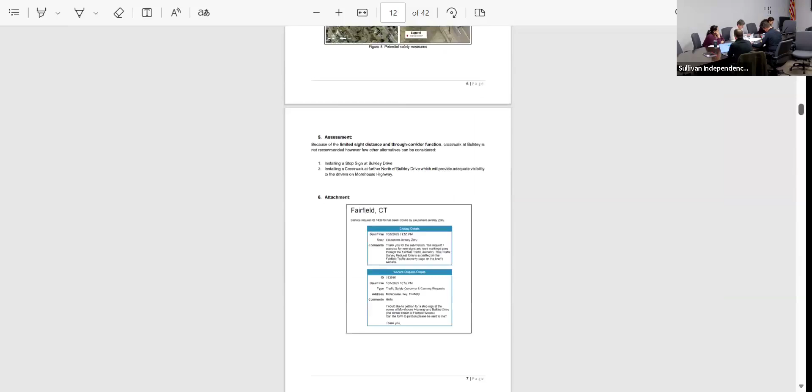There was a diagram in the packet. Can you pull that up? Yes, let me pull the diagram out quickly so I can easily see. I don't see the location properly written on the report. Yeah, it does show it's slightly west of where that roadway intersects, the Y intersection. Yeah, it's Mill Hill Lane, just southwest of Mill Hill Lane. Okay, you can see it.

So that's the location. That's where we are proposing a crosswalk because of the adequate sight distance, since there's an entrance for cars there. That's the right location because residents have been requesting pedestrian crossings. There's a school nearby, and when they're walking, they don't have any crossings, so that was the reason we're proposing a crosswalk over here.

Any comments or questions, or anything anybody has?

I have a question. It's hard to tell from this drawing, but is there a sidewalk from here up to the school? No, there's no sidewalk, right? I don't think so, no sidewalk. There is a sidewalk on the Mill Hill School side, on the same side as the school, but not one across the street where this crosswalk would originate from. It was hard to see from the drawing. Yeah, it's not very clear. So there's a sidewalk right here? Yes, yes, okay.

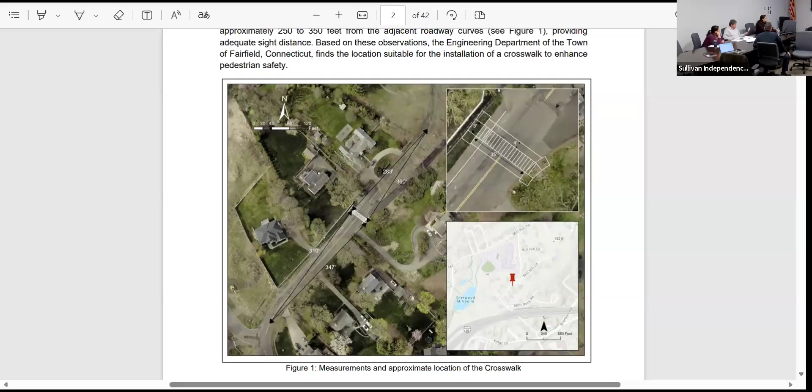Can we put fog lines in, so there's a place to walk? Well, that's what I'm saying, today the request is only for a crosswalk.

Put a fog line in or not, well let's see, quickly I'll go over the width of this roadway. I don't know, they haven't captured the roadway width either here. I think it's right there, 30 feet, 35. It's 35, so there's a fog line here, but it doesn't look like there's a fog line on the non-Mill Hill side.

Does it seem like there's enough space to put one? At 35 feet, we need, what, 20, right Megan? We need, well, 20, yeah, usually it's 24.

Yes, that's pretty... but Jeff, just to note, I'd been out to the site, and that 35 feet is a little bit misleading because that's at the edge of the intersection. Mill Hill Road itself is probably not 35, it's probably more like 24 or 30 at most. It's because you're at the widest part near an intersection, so it's a little bit wider than the rest of the roadway.

That crosswalk location was selected because if we put the crosswalk on the north side, or the other side of the intersection, there was a grade change which would make it very difficult to meet ADA compliance. And on that side, the shorter distance of 283 for the sight distance would go below, like, 250 or 220 or something like that. So I would even reduce the sight distance further there, which is why we actually had to move the crosswalk to the other side of the intersection.

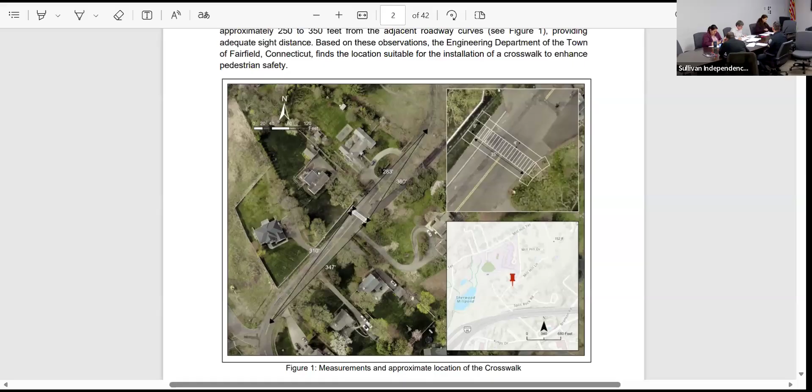We also have 2 reported crashes at Morehouse Highway which resulted in injuries. There's an angle crash, and one fixed object crash. So there were only 2 crashes total, and the crashes are shown on the map. I can actually scroll as I am talking, if I can.

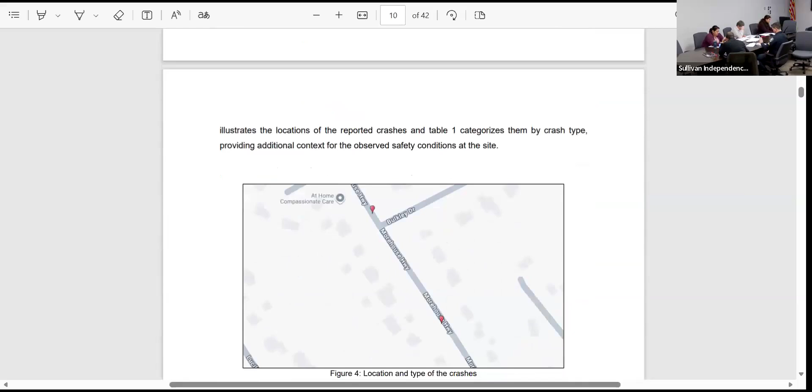So let me open the plan, just bear with me. Here, so I have the crash data, the red marking shows the crash spots. So that's the kind of background on the data collection.

So there are two issues. One is the site observation. When our intern went out and observed the site and collected some data, he was turning left from Bulkley Drive onto Morehouse.

He said that there's a sight line issue. He cannot see the cars coming, and it's very hard to judge the speed, and it was very hard to make the left turn. When we visited back in November, we noticed similar issues, a sight line problem because there's a crest curve at Morehouse Highway. So that's an observation and perception we noted.

We also further evaluated the stopping sight distance because there is a crest vertical curve at Morehouse Highway near Bulkley Drive. Bulkley Drive makes like a U there, so I'm just talking about the first part of Bulkley Drive, not further north. So that is a critical spot.

So when we calculated the engineering calculations, taking into account the vertical crest curve, we used a 6% grade. We also took into account the object height and the driver's eye height, and we used the AASHTO manual. It says the stopping sight distance at 25 miles per hour should be 155 feet.

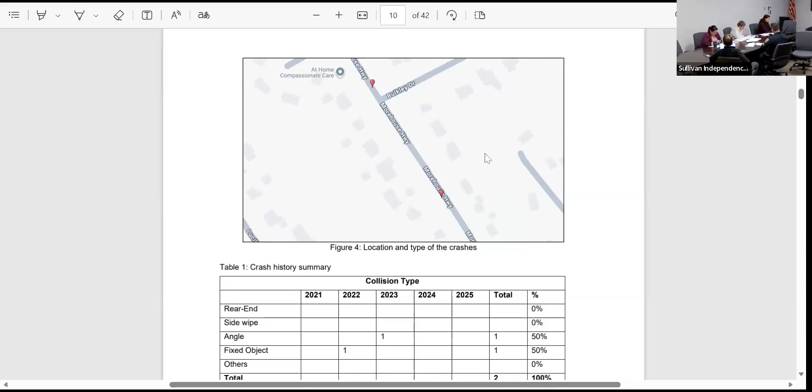Another suggestion - somebody spoke to Bill and said they want a crosswalk. So if any crosswalk needs to be proposed, it shouldn't be at Bulkley Drive, but further north at Bulkley Drive, which we've shown on the plan. So those are the two alternatives we're considering: first to improve this stopping sight distance issue, and second, the crossing issue that was brought up.

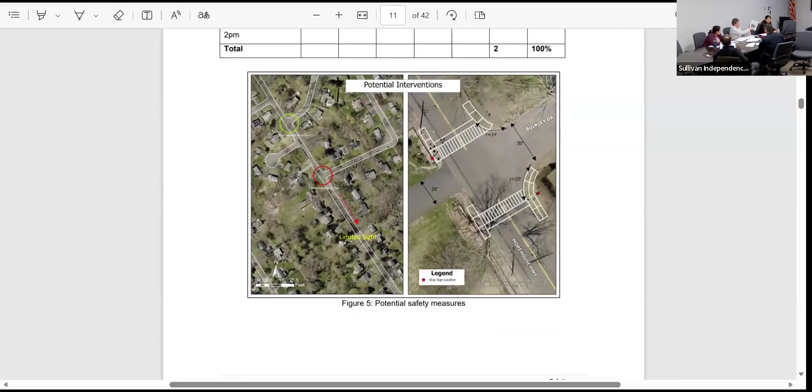Can I ask a clarifying question? Is the proposed crosswalk at the first Bulkley Drive or the second? Second, the further north one. Yes, okay, got it - this green one here. The first, or if you're going north, it was the first one, right?

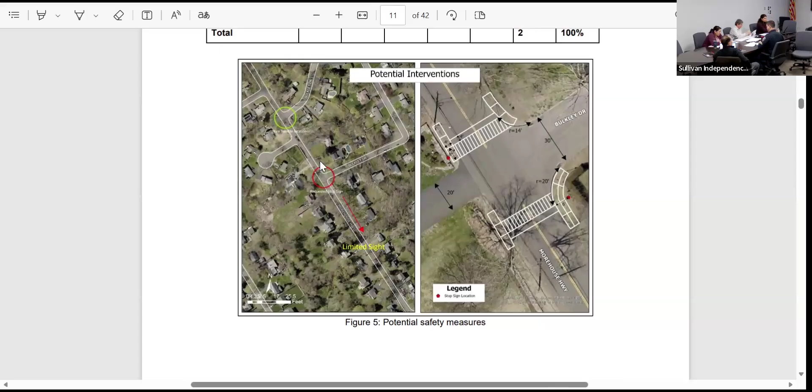Not this one. Yeah, it's the first one, but it shows two possibilities for a crosswalk. That's where the sight line issue is - the northern crosswalk at the southerly intersection, more southern part. Yeah, there's no... and that's where there's a bit of a sight line issue. But you're saying the proposed crosswalk is the northerly extension of Bulkley?

So a request for a stop sign is at the southerly extension of Bulkley. The proposed crosswalk is at the northerly extension, this green one. Okay, got it. Green is where the crosswalk goes, but the red one is a critical zone I'm talking about - the sight line issue.

So that's where we are. But what does the detail look like - does it correspond to either one of those? I don't know why they're putting two crosswalks. I only know that green one - there's a street across, is that a driveway across the way there? Yeah, it's a driveway, about 20 feet.

Okay, I will just go with this green one - I mean, I will go with this crosswalk. I don't know what this other crosswalk is here. That makes sense. So that's one alternate with this crosswalk here, and then the red one is a critical zone. May I ask another question?

Is it desirable from a roadway design perspective to have them be separate, or would it be too confusing to combine those features? I'm asking just for educational purposes. If you ask me, I would just make one. I don't know what these two driveways really make confusing.

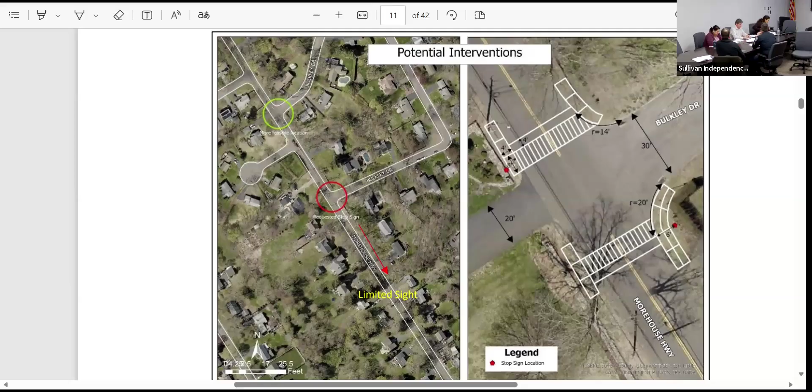Good, I'll move on to the third one: stop sign request on Pansy Road at Valley View Place. This is another one we received and had to do further studies. We presented this in November and did not make any decisions because further studies were required. Let me move on to my screen so anyone on Zoom can see it.

So this is where we are. This comes from a resident at 62 Pansy Road. They're concerned about speeding and reckless driving passing Osborn Hill Elementary School in both directions. He thinks this is a dangerous situation for students and parents walking to and from the school, as well as many seniors and dog walkers. Additionally, they're concerned that the proposed 18-unit condominium development near the intersection of Stilson Road and Black Rock Turnpike, along with two new homes planned on Pansy Road, is expected to increase traffic volumes, including heavy construction vehicles, with many needing to use Pansy Road as a cut-through route to bypass construction-related delays at the condominium site.

So the resident has requested two things: installation of a stop sign at the intersection of Valley View Place and Pansy Road, and increased enforcement by the police department, including targeted speed enforcement and issuance of speeding tickets. So that's where we are.

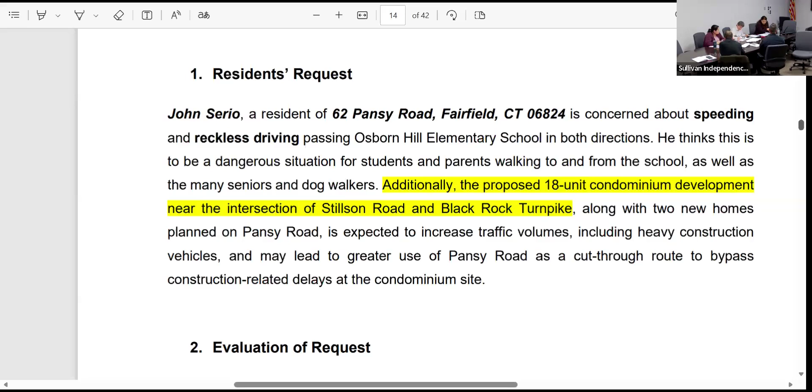We collected the data. I'll move on to that. We installed Black Cat radar units at selected locations from 11/19/2025 to 11/26/2025. We got the results: the posted speed limit is 25 miles per hour, and the average speed is 30 and 31. I also have the 85th percentile here: on the left of Pansy Road it's 34 miles per hour, and on the right it's 35.9. So technically it's more than the average speeds there. That's the data collection, I'll move on to the next page.

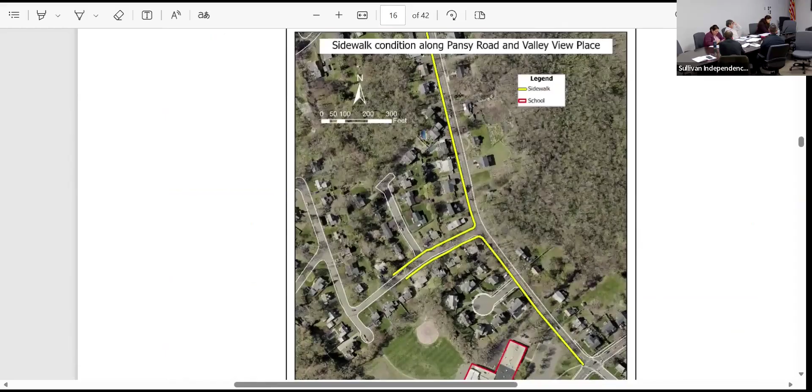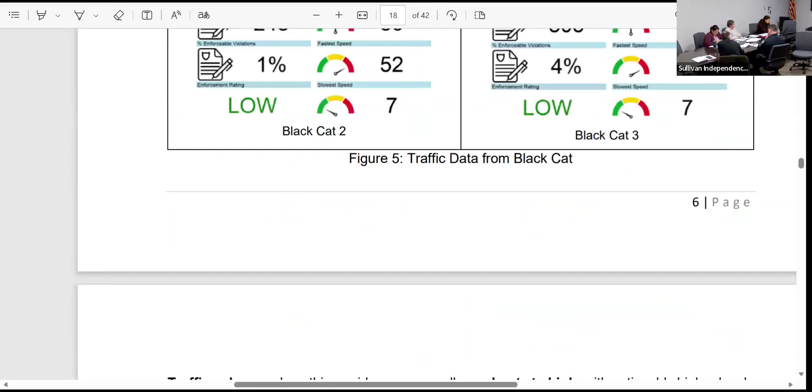So Megan, back to your Black Cat data - first of all, your presentation is really helpful, I appreciate it. Back to the Black Cat: somebody's doing 74 miles an hour on that road? There's one outlier, 4% of people. 4%, so 4% of how many? Of the 803? Yeah, that's what it shows. No, it's the 19,000.

692 trips. That's 4% of 19,000. Traffic, okay, yes, that's a little more reassuring. No, 803 is 31 miles per hour out of.

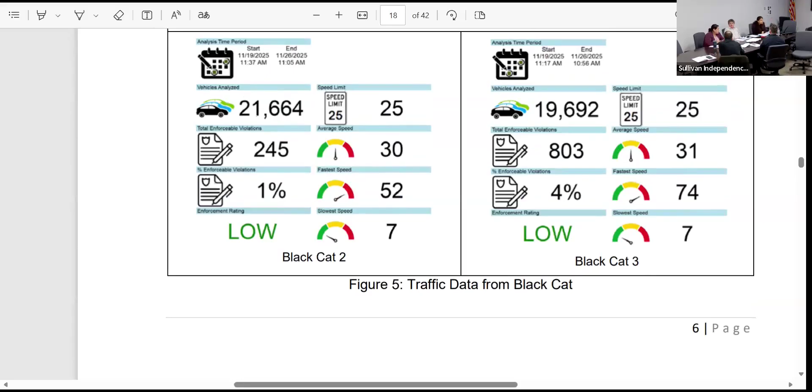And that's over whatever couple days that is, so. It's over the 19th to the 25th or 26th week. And it has no distinguishing from an ambulance or emergency vehicle or a high school kid driving fast.

You don't have that. That doesn't mean 4% of vehicles have that speed. 4% of vehicles have the speed that is beyond the limit. But 74 is the fastest speed. That is not the 4%.

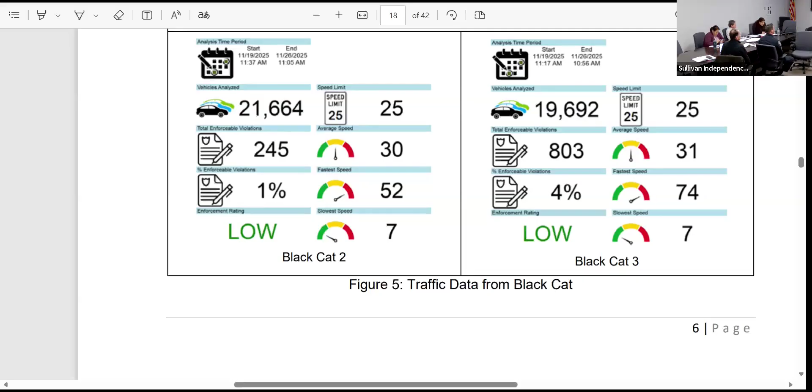I'm sorry, I don't see a 34 up there. 74. Oh, the 74. Fastest speed of one car. Right, it's not 4% of the cars.

Okay, that's somewhat reassuring. Well, it's the fastest, yeah. But I don't want to get into the numbers, but that's just really concerning. Somebody's doing 74 miles an hour on that road.

And back to the median, it's basically 31 and 30, 30 and 31 miles per hour. So how is that viewed? I mean, the speed limit's 25 there, right? How is 30 or 31 viewed as?

For us, as standard practice nationwide, even with speed cameras, it's nothing - we don't stop or enforce 10 over the limit. It's over that, and that's generally accepted. If we started pulling over everyone going 26, 27, 28 miles an hour over, 31's not bad - we'd be pulling over everyone, and we'd be even less popular than we are now.

Thanks, I was just trying to - so yeah, this kind of goes with what we've seen. We've done a lot of enforcement on Pansy Road. I should have brought the numbers, but most of it's at the stop sign, because we don't get a lot of the speed issue.

At the traffic light - no, actually if you go further up at Brookside, the stop sign, a lot of cars, because it's a very busy cut. Cars coming on Brookside making that left, they come around that corner. So we did some improvements with the stop signs at that intersection to try to alleviate it, with a lot of enforcement there. But the speeding - people do speed, but it's...

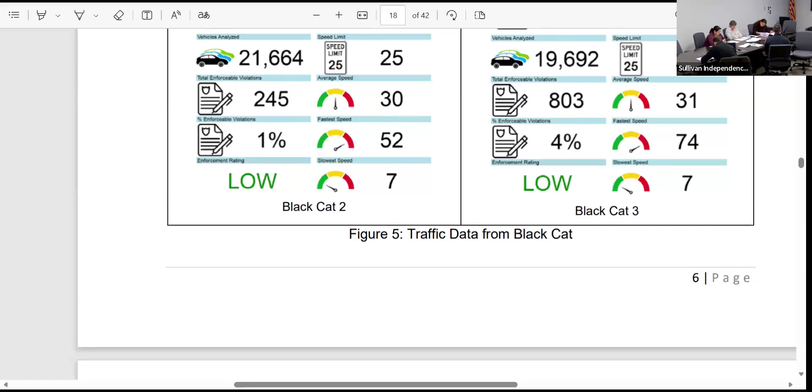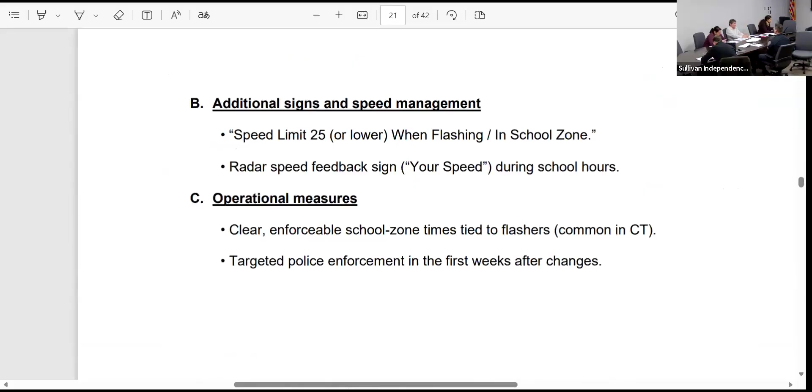The other concern I have on the school zone and flashing sign is, like we discussed before, when you take one action it may have a snowball effect. I could see any school saying, well, why do they get a flashing sign and not us? I'm not discounting that, and perhaps some upcoming programs we're looking at - Safe Streets for All, Safe Routes to School, and some upcoming grants - will look at a holistic picture, and that might be the time to address those situations, because unfortunately this isn't unique to just this school.

So that's where, correct me if I'm wrong, we don't have the budget right now to do all the schools, so I think we'd have to put it into some sort of program to do that.

But maybe not the flashing light. Yeah, the flashing, but certainly a sign, we can afford that. So that's just my opinion on that.

Bill, I liked your suggestion of the fog lines too, because in my experience, you put them in on Churchill and it made a huge difference. It's similar to Morehouse, a lot of people walk on it, and people fly through, it's a cut through. Narrowing it down, I don't know if we can get to 10-foot lanes, but that would certainly slow people down.

And I don't think that was one of your suggestions though, was it? No, not the fog lines, that's just what Bill brought in. But back to the schools, if we could consider narrowing the lanes around every pathway to school that doesn't have sidewalks, that would be well received, because the fog lines really do slow people down.

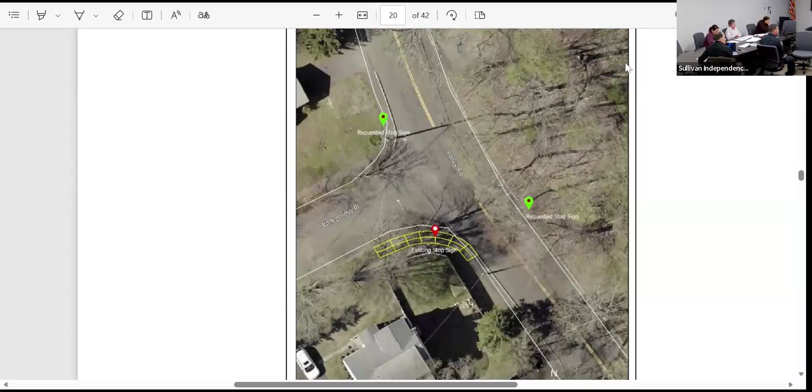And I went through the Black Cat data - most of those 4% run at night, so it's after school hours. That's an important thing to know. If someone's speeding, you'd rather have them speeding at night rather than during school or busy times.

What do we call these things, the motion? The motion stands as you read it. I'll second. All in favor, say aye. Aye. Aye. Okay.

Okay, so we're done with this, Pansy. Now we're coming to the removal of on-street parking, meaning to install a no parking sign at Old Post Road - this is for John Street at the Old Post Road intersection. The resident is concerned about limited visibility for street parking; there are bushes along Old Post Road by the intersection of John Street and Old Post Road. They mentioned a large bush at the corner and a sharp curve make it hard to see oncoming traffic until vehicles are very close.

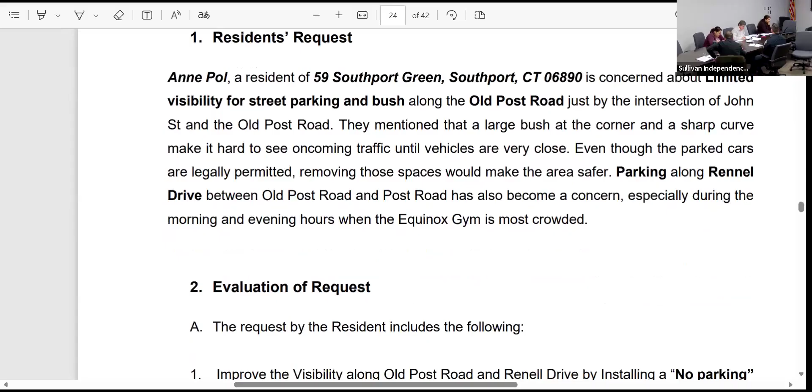Even though the parked cars are legally permitted, removing those spaces would make the area safer. Parking along Rennell Drive between Old Post Road and Post Road has also become a concern, especially during morning and evening hours when the Equinox gym is most crowded. So during gym hours, on-street parking gets busy and sight distance becomes an issue at Rennell Drive and at Old Post Road intersecting John Street. That's one of her concerns.

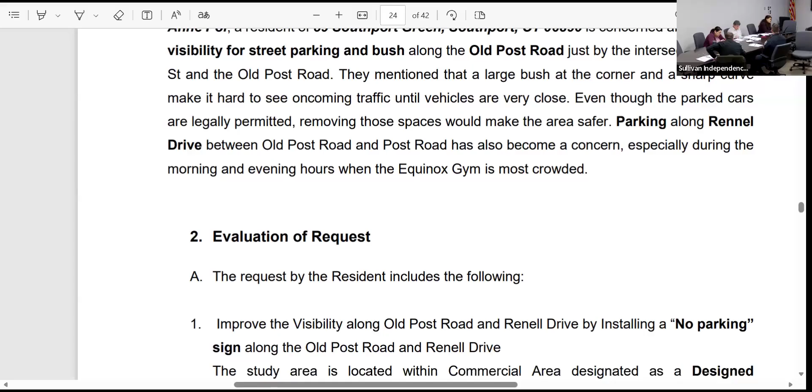The request by the resident includes the following: improve the visibility along Old Post Road and at Rennell Drive by installing a no parking sign along Old Post Road and Rennell Drive. So that's her request - we just did some studies there.

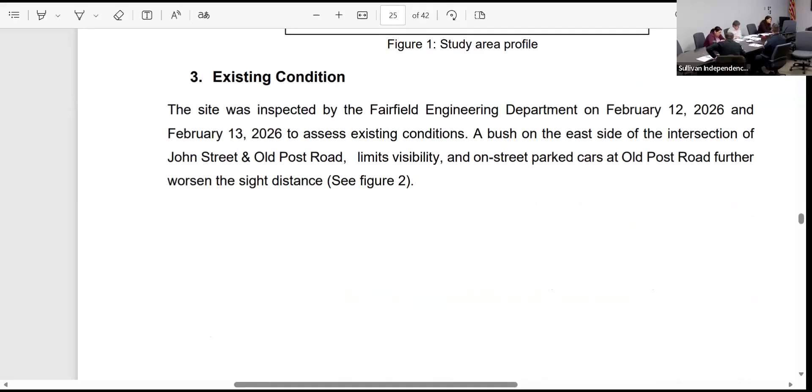We visited the site, and definitely the bush is on the east side. We will request the DPW to clear the sight line, but along the sight line there is also on-street parking at Old Post Road and Rennell Drive.

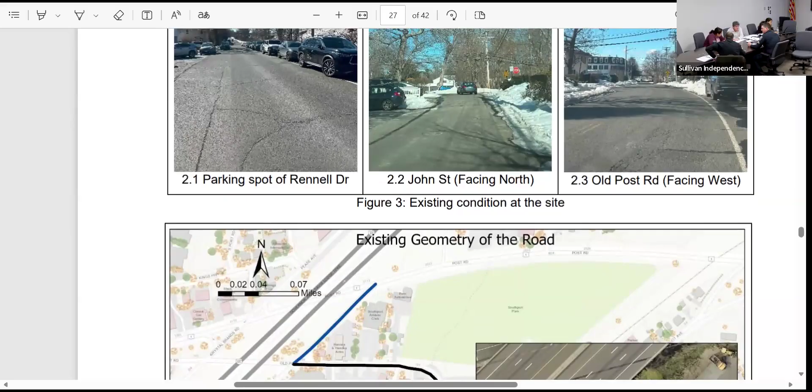We're getting a sidewalk along that, right, Emily? Yeah, with the new development we just approved right there, that should improve it. And the parking is for the park right there, is that right? There's designated spots, but what we find, or at least the complaints we get, is a lot of overflow from the gym. Yeah, because I think there's a time limit - you can't park there more than 2 hours.

I don't know about the park, but those are all kind of off the road, so they're not an issue. But the street parking complaints we get are gym related. Is it where those little white dots are? Yes, that looks like a pretty tight spot there.

It's a curve, so it's tight. Where's the toothpaste gonna squeeze out if we block them? Where are they gonna park if they're not parked there? That is a concern. Park on Rennell.

John Street? We're gonna go to Rennell. John's very narrow, so I don't really see them going there, but Rennell at least is a straightaway. It's a one-way road, it's wider. The other is all curved. I'd rather have them there than at the curve.

For sure. And do people use that designated parking in Rennell? That's from the park, there's a park there. Oh no, he's saying Rennell, which is the other street. We're actually parking on both sides of it. Is that for the gym? People use that for the gym?

Yes, that's for the gym. Who owns it, the state? That's gotta be the state, because at one point they were parking off the street, which we didn't mind at all, but the state had an issue. So are you allowed to park in that Rennell spot? Yeah, but the state owns that. The state owns certain areas - it was just paved over and extended, right?

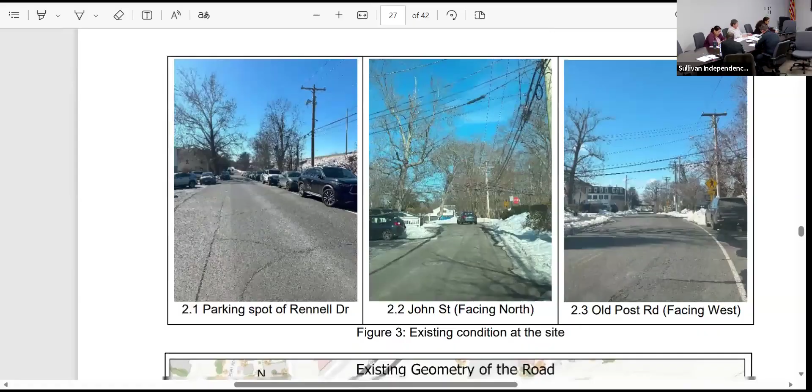Oh yeah, there's a picture here. Oh yeah, it's parallel. Keeping people from parking on Old Post Road, that's the question.

That makes sense, much like we just did the bus, going around the curve. This one looks worse because it's only 25 feet.

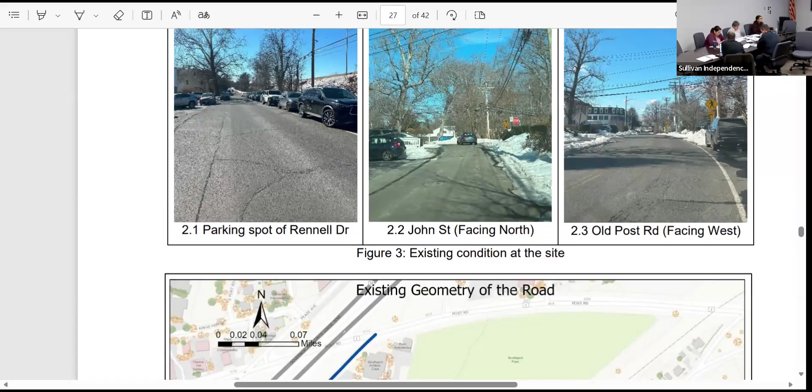We just approved 2 projects right in there. Good projects too, right? I hope they weren't planning on parking on the street. No, they were not, they had plenty of on-street and off-street parking on the property.

Any questions? I don't have any questions. I'm just considering the fact that this is blocking the sight line - something to consider, removing or putting up a no parking sign.

I move to approve. Can I move to approve? Wait a minute, I want to see if... because it was like a double, and this is where we get into trouble sometimes.

It's a double request. One request is a no-brainer, I think we're all ready to approve it. But what about the second one, the Rennell Drive? That one is the decision-making thing.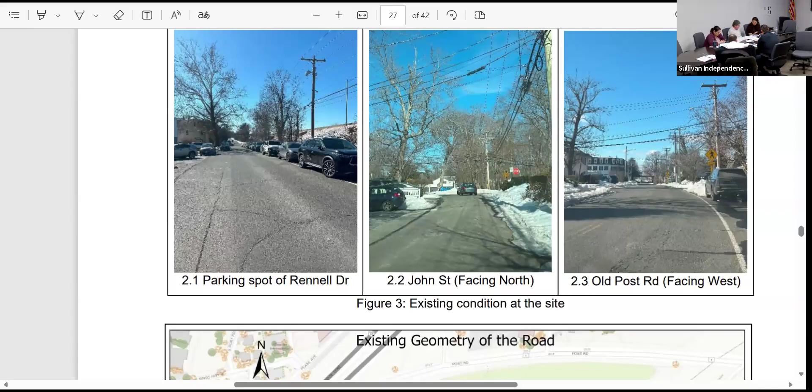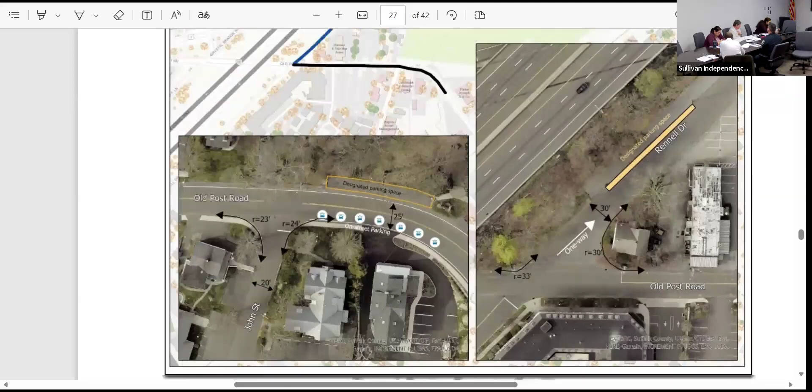I mean, me personally, I think we all agree, Old Post Road, yes, we would approve that. And for me, the Rennell Drive, I would just deny it, given the fact that it's been a lot better than it's been in the past, and in my opinion, I don't want to tamper with that. So I would deny that one, but approve the Old Post Road. Again, all based on safety.

Any questions? Let me see if there are any questions here. Okay, Anthony had to leave, so he left, but there are no comments or questions from the public.

I can make the motion. I think it was the chair, you're not supposed to. Oh yeah, I'll make the motion. Sure, yeah, go ahead, you can second. No, yeah, I'll second it. You go. Okay, I'll make the motion that we approve the...

No parking on Old Post Road, but deny it for Rennell. Old Post Road, sorry, and deny for Rennell. I'll second it. All in favor, say aye. Aye. Frank? Aye.

Oh, you guys did it, never mind, sorry. Yeah, that was the one we did before, yeah. John Cattell was having computer issues.

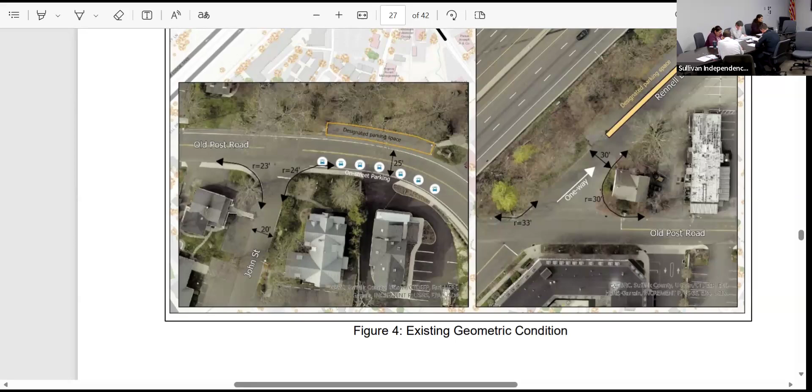I mean, Sunny Ridge isn't really a decision point, it hasn't left us any decisions or situations to address. I'm just bringing it to the board's knowledge, maybe to consider something here. That's why we did some research on this. The Sunny Ridge Avenue residents are concerned about speeding and on-street parking on both sides of Sunny Ridge Road, and they think this is not safe for kids and pedestrians walking on this roadway.

I'm going to move to Sunny Ridge quickly so people can see. It's a pretty low volume road. The average daily volume is 572. There are only 5 crashes in the history during the last 5 years, all property damage, and somehow related to on-street parking. Those are the glaring facts here.

Pedestrian presence is low, obviously because of winter and snow, so it's not a great time to observe, but we will go again in summer and see what the issue is if pedestrians are there. No speeding as per the Black Cat data. How much is the speed? There's only 25 miles per hour posted speed, and 18 is the average speed I see. The 85th percentile is 29 on Sunny Ridge Road, so that's the speeding there. 5 crash histories, no bike lane, no sidewalks.

She is asking to remove the parking, again no on-street parking, since crashes were somehow related to on-street parking. But this is just a discussion item, just if anybody has ideas. We haven't reached any decisions like whether we should remove it or not, so it's more like brainstorming, just to think it over.

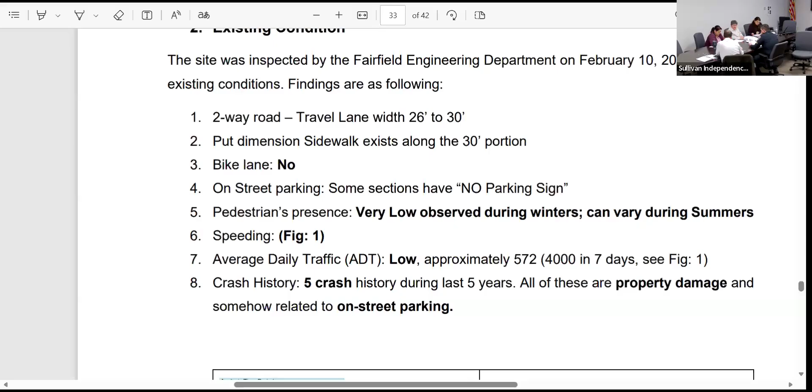Is it a yellow curb issue by where the intersections are, so people can't cross the street? No, there wasn't anything specific. It's just along Sunny Ridge where on-street parking is an issue for them. Because I don't see any signs saying no parking here to corner. Oh, there is - there's a sign there. Usually is. Yeah, no parking here to corner.

This looks - I mean, I wish every street in town looked like this, you know? This is a pretty good street.

I said we'll informally keep an eye on it because it's on our radar, and same thing with patrols - if we notice something, we can always bring it back. But I think there's nothing we can do really right now, not based on the facts or the data. The data is not enough to support it.

Like you said, most of those crashes are property damage, like a mirror getting knocked off, and you prefer that over something more serious related to on-street parking. All of these are property damage and somehow related to on-street parking. So based on need, you can't just make a change.

But it's such a low speed - you guys have limited overtime in your budget, so... yeah, we only have 25 miles per hour. The speed is not aggressively there.

So I don't know, I wish every street were like this one, right? It's got trees, sidewalks, below 25 - it's got a lot of the elements that you would want on a residential street. Yeah, it's a great street. So we'll leave it as it is for now. If any thought process comes along the way, we'll keep it open.

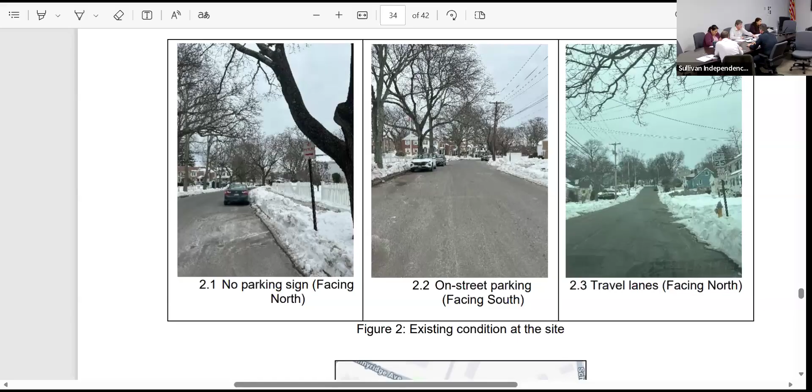Okay, so that's Sunny Ridge - let's go over to the Fairfield Beach Road discussion. I'm going to open it on my screen, and I'll give some background on this, and then I'll have John talk about it.

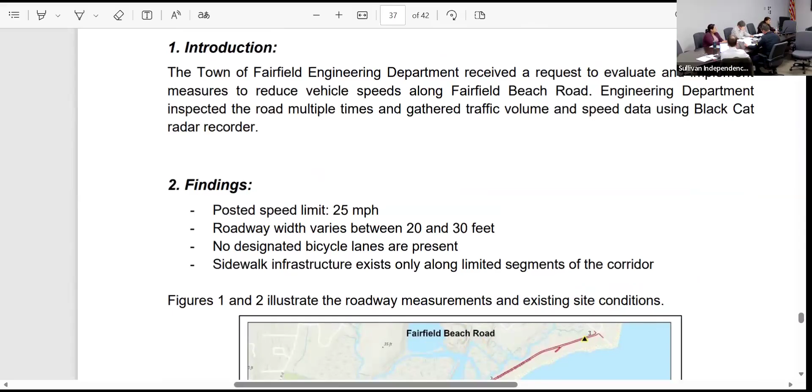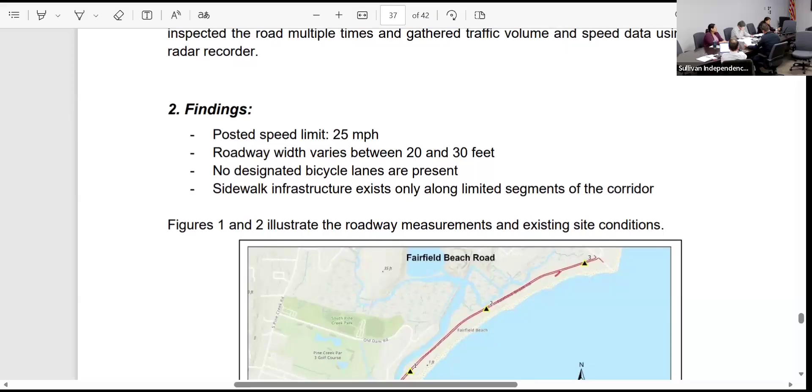So we evaluated Fairfield Beach Road. We received a request to evaluate and implement measures to reduce vehicle speeds along Fairfield Beach Road, and we did - inspected the road multiple times and gathered traffic volume and speed data using Black Cat data. Our findings are this: the posted speed limit is 25, roadway width is 20 and varies between 20 and 30 feet, there are no designated bicycle lanes, and sidewalk infrastructure exists only along some limited segments.

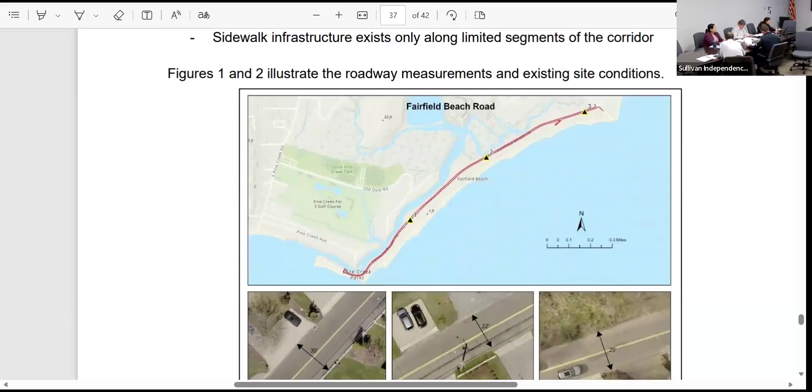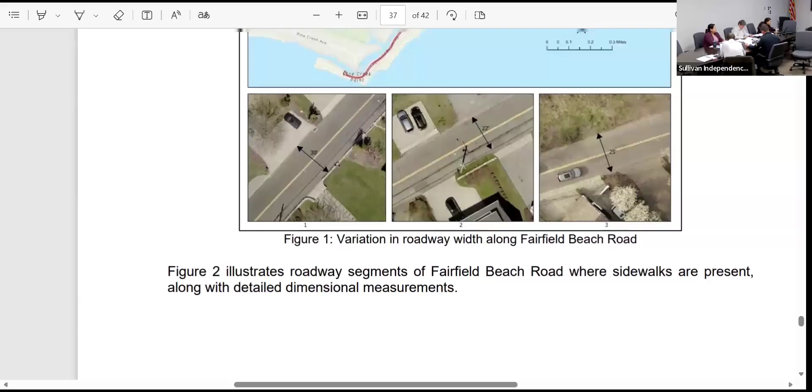This graphic seems to depict Fairfield Beach Road from the Sea Grape down to the peninsula. Our study is from Beach Road to the Sea Grape. Okay, I think that's in the next one. I just want to make sure that the data collected is commensurate with what we... Okay, so the second one, where sidewalks are present along with detailed, then it should be this one.

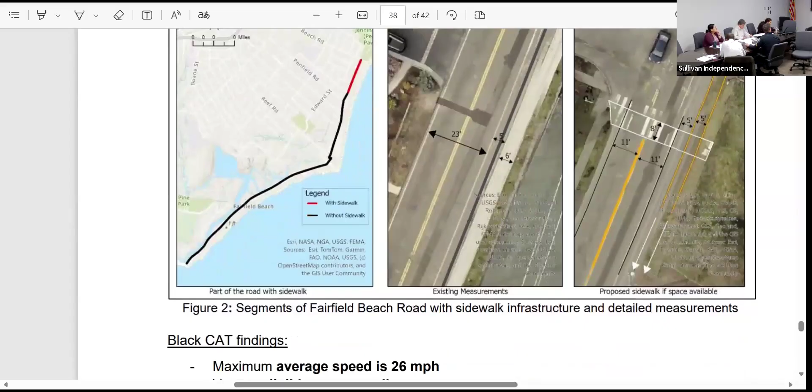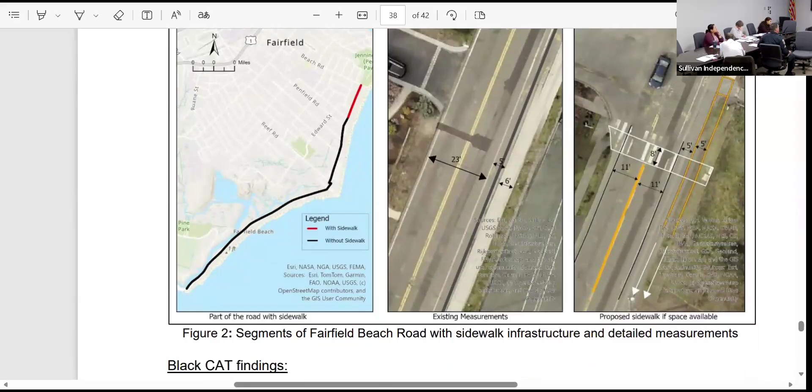Correct, Beach, that's it, Road, yes. It actually shows both sections. Yeah, it includes the section you're referring to, that's where we wanted to start. That's basically the nutshell, we collected everything overall. Beach to reef is the section. Okay, so I'm not missing anything. These are the Black Cat findings.

I'll just go over the data collection first. The maximum average speed is 26 miles per hour. Can I ask a quick question about that though? Is that the average speed for the entire road?

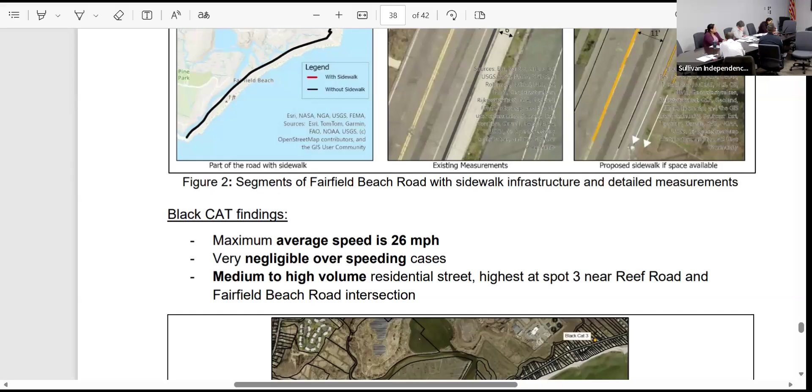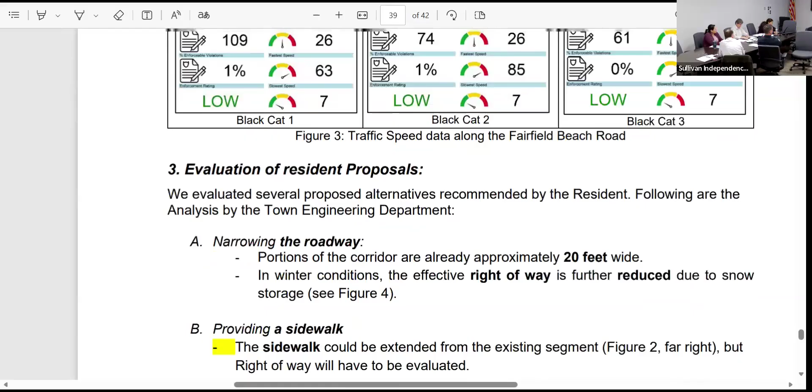Which it looks like? No, the Black Cat was placed over here, if you see. Oh yeah, he might not know, I think there were 3 different locations. Three locations here. I have it on the map. So is your summary from locations 1, 2, and 3? Yes, that's what they placed. Go back and show them where 1, 2, and 3 are. Yeah, it's right there.

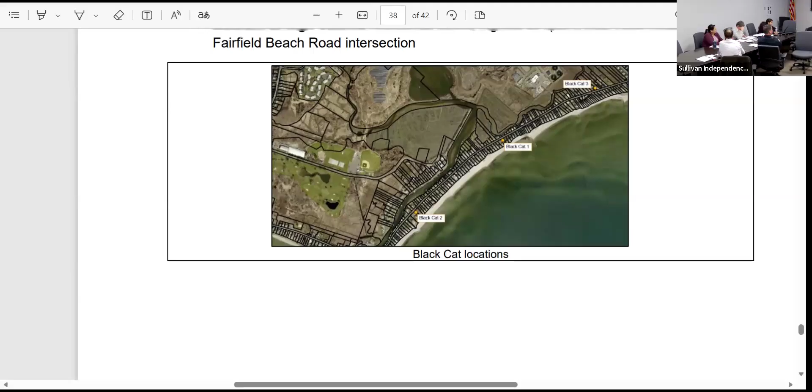I'm trying to understand, so Black Cat 3, that's the corner of Beach Road to presumably Penfield Pavilion? I can't tell, what are we looking at there? This is the peninsula part. Yeah, this is not what I wanted, I don't think our stretch is represented.

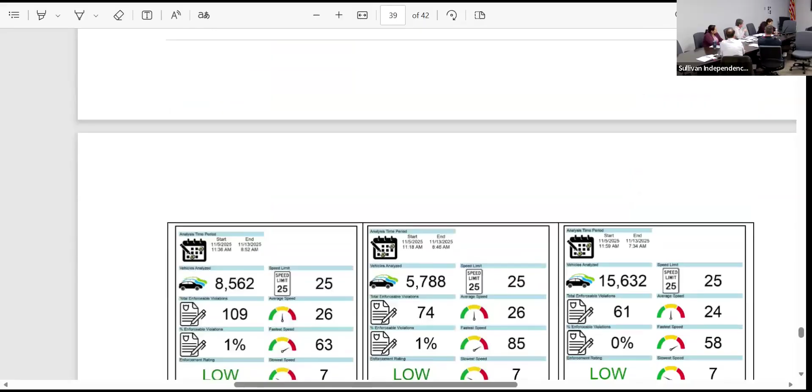So that's not what we asked for. We can go over Black Cat, but I just want to start this conversation today with the average. Will it matter if we look at it by sections? Because they're different. The peninsula section is narrower, different, and you might get artificially low speeds compared to the other, because the whole thing wouldn't be a fair assessment of what we're looking for.

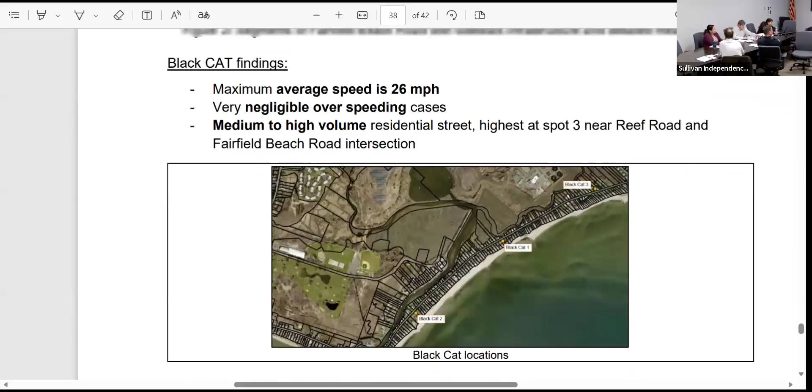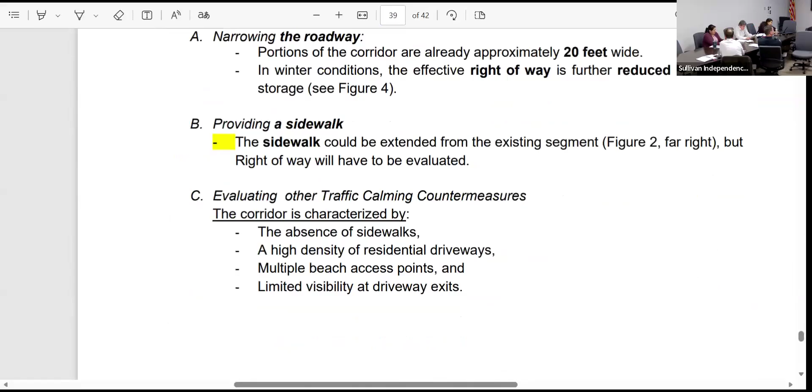From Reef Road in particular to Penfield Pavilion, the stretch where I live, that road is designed like a highway. It's over 30 feet wide, it's a straightaway, it doesn't align with the neighborhood, and it signals to drivers that they can go as fast as they want. That's where the speed is most pronounced and where we were trying to get data to validate and support the conclusions that we who live on that road already know to be true.

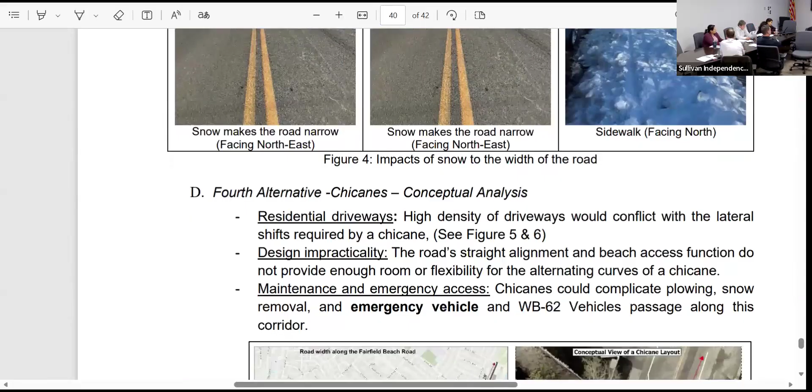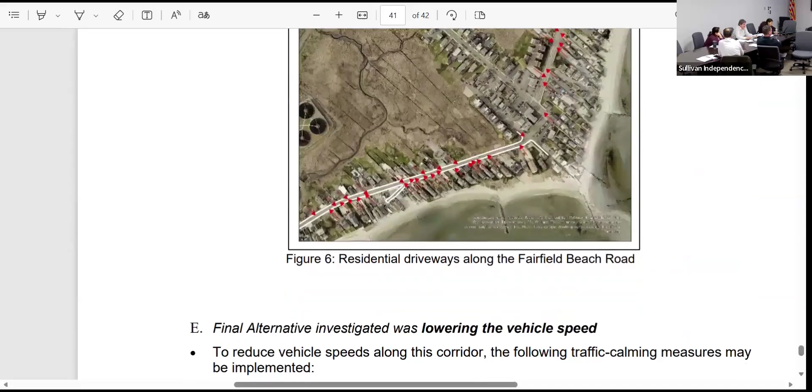Are you sure it's not in the third capture? Yeah, if you go back up to the other map here. One picture I think shows that section, yeah, I think it's a mix. I think they actually did, because when you go to the one that has the 15,000, well, that still doesn't seem like enough trips over a week period.

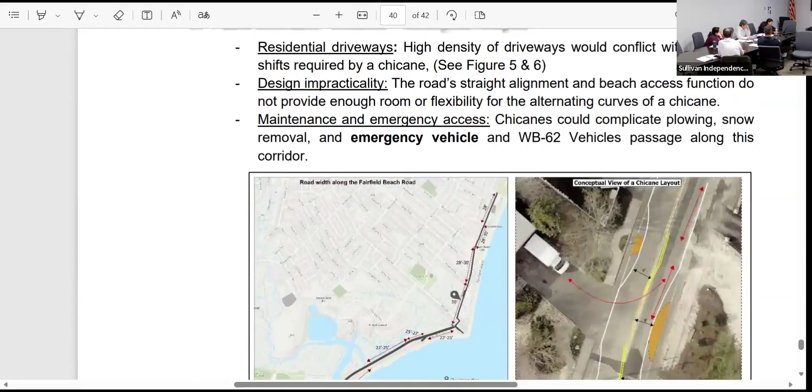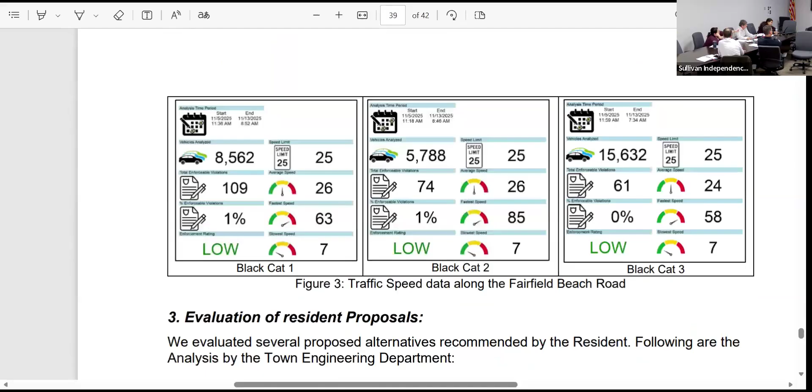I don't know if they placed it there, because I did ask. I tried to call about this because I live on the road and was trying to see, I could never see where the Black Cat devices were deployed on our side of the road, but I was pretty sure the third one was on the right. I have a feeling the first two, if they're on any stretch of the peninsula, those are lower volume, but if you look at the higher volume, maybe that captures it.

Yeah, you can see how that volume changed drastically at the west end. That might capture the very west end of that strip, but then we would have to go back out and look at it. Black Cat 3, it's west of Reef, I think. I think we'd have to go back out, so that's not what we wanted for the peninsula.

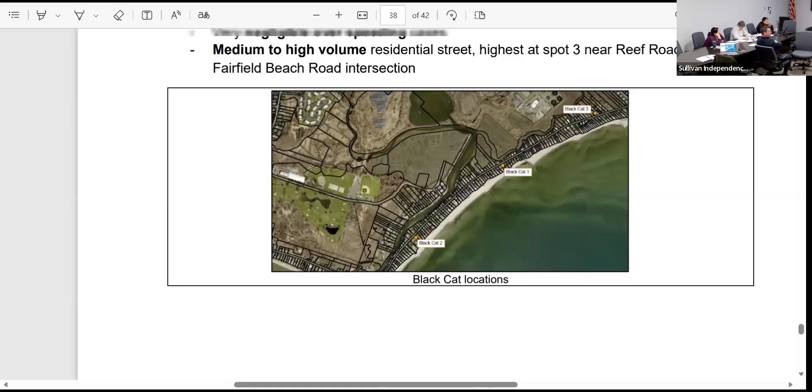Go back to your map. So Reef is about right at the beginning, it is right here. So this is where they did install the sewage treatment plant, yeah, here's the sewage treatment plant, and so Reef is like right here. Okay, yeah, everything along the peninsula is very narrow. I don't think there's probably significant speeding there, but where John and I live...

I live right across from the Fairfield Beach Club. People come down Beach, they don't make a complete stop at that stop sign, they come whipping around the corner and then they just straight shot drag race up.

All the way between Penfield and Pavilion to the beach, next until the stop sign. On our side of the road there's the driveway, mailbox use, you're stepping into oncoming traffic, and generally college kids texting. I can think of 4 families that have little kids.

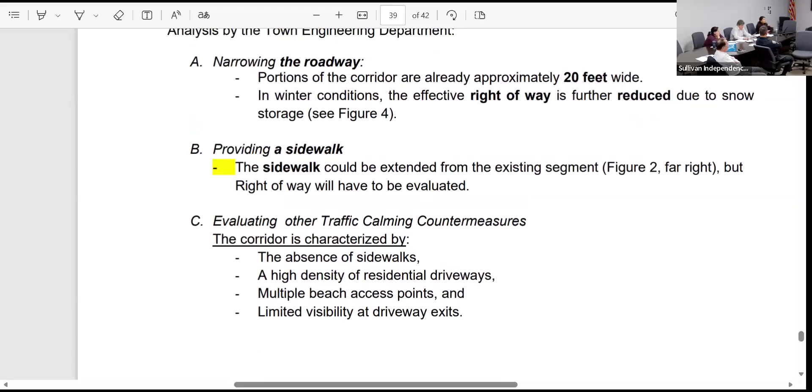Regardless of whether the data was collected correctly, let's go back to the data, because for that stretch of road an average speed of 26 miles an hour seems ridiculously fast. It's basically a driveway, right? Very narrow, that section of beach. And somebody did 85, college kids 58, 63, Ubers, you name it.

We're talking about the narrower section of road where there's already a speeding problem in my mind, on the more constrained part of the road, not where you guys are talking about. I know exactly where you guys live.

Okay, fair enough. 100% with you. We just wanted to go through the proper channels to get the data and follow all the steps. I submitted this back in July, so I guess here we are today.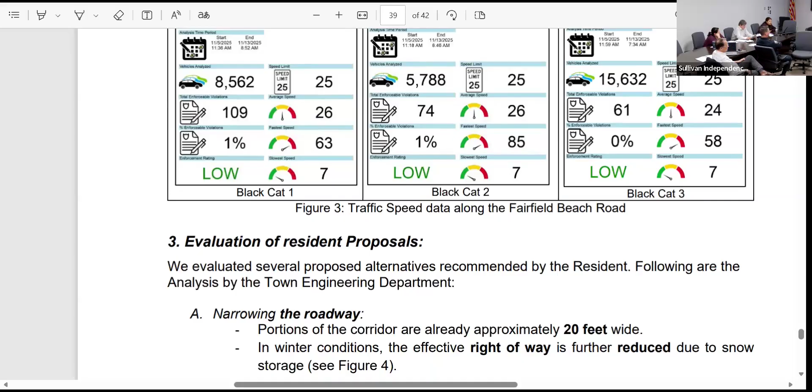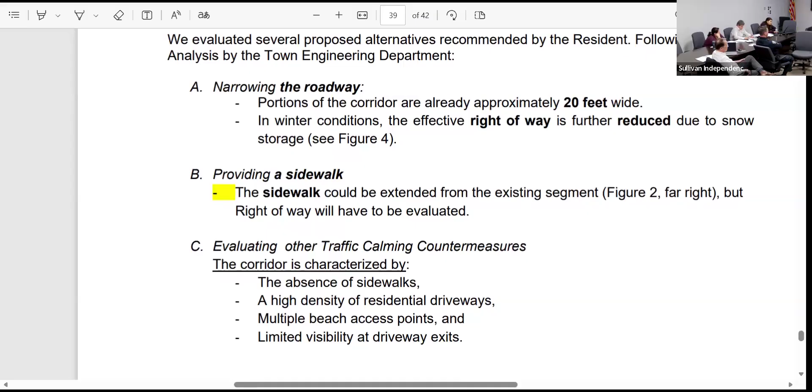This is really being spearheaded by the Fairfield Beach Residents Association, I'm just the head of the traffic committee. The other comment Scott really wanted me to underpin is regardless of what the Black Cat data is showing, that's showing the speed of the vehicles or volumes, but what it doesn't capture is how busy of a pedestrian stretch of road this is, how many people we have walking, the composition of the people.

You've got elderly people, you've got a lot of young kids, we have bikes, and they walk on both sides of the road, run, you name it, and we only have a sidewalk on one side. There's a lot of variables there that create a real conflict with safety and the Safe Streets initiative.

So the whole purpose of bringing this today is regardless of the Black Cat, we will fix that area. It's not the only driving force of what you are saying. Black Cat just putting the speeds over there is supporting the countermeasures. So don't get discouraged, we will work on that Black Cat at the other side.

It also collects data. I'd make the point that we want to do the Black Cat when the weather's a little bit warmer too, to get more of a seasonal picture. There's that, and then you have college students if it's in the summer. It's even different in dynamics.

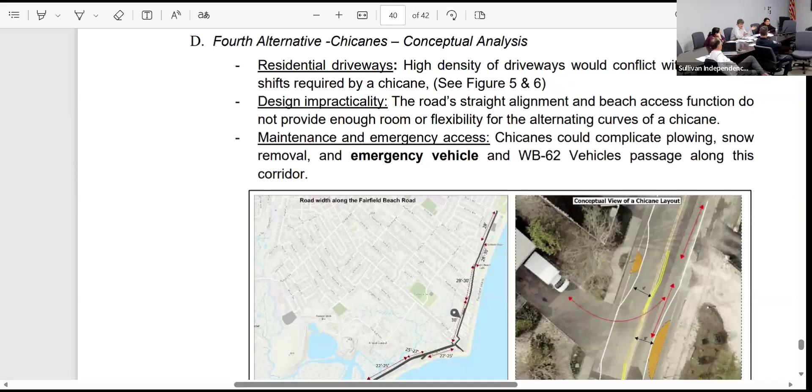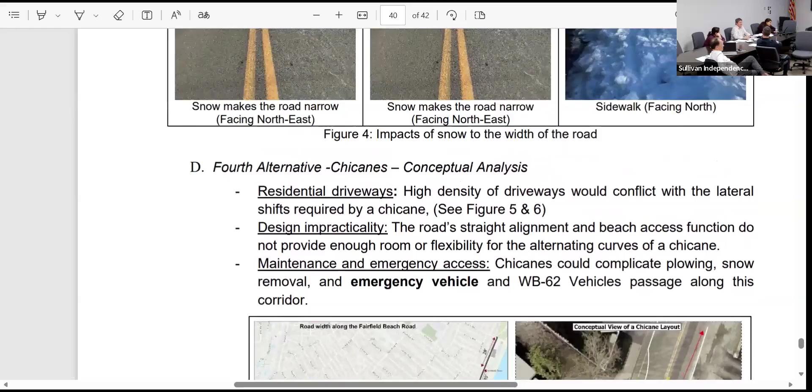Late March or April, when you start getting 50 and 60-degree days, especially the winter that we've had this year, I expect a huge increase in activity for people who have been, I won't say locked in their homes, but when it's 5 degrees out, not many people are going outside.

The whole purpose of bringing this now is to get everybody on board, to start thinking about it, and we actually looked at your proposal. This is why I have you here. As I said, the data collection is not the driving force, it's part of the countermeasures evaluated. So we'll start with you on these.

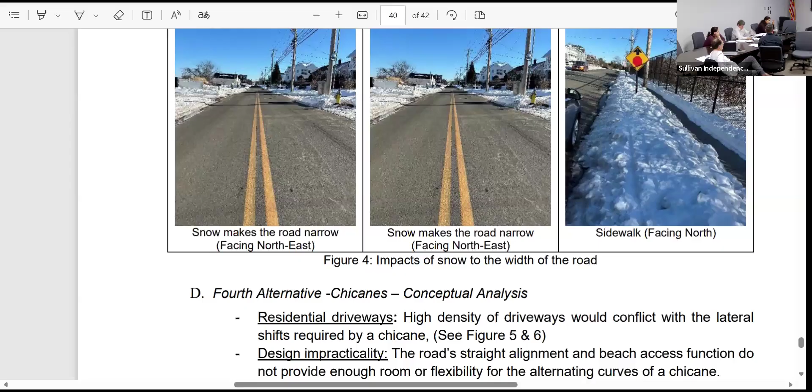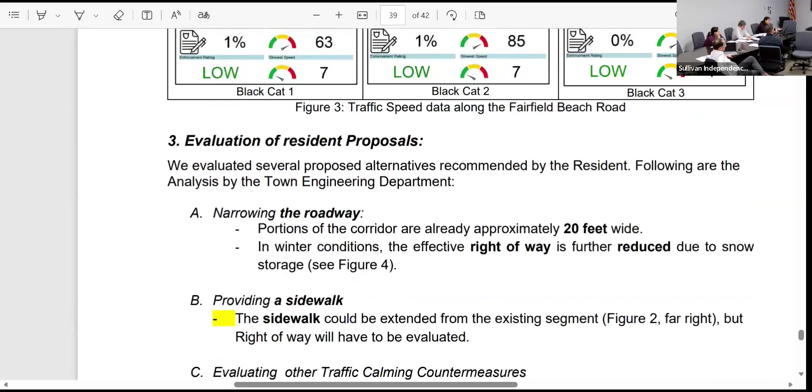We did Black Cat, we will work on that. I think these are some of the evaluations of resident proposals that technically you have proposed, right? Narrowing the roadway, right, John?

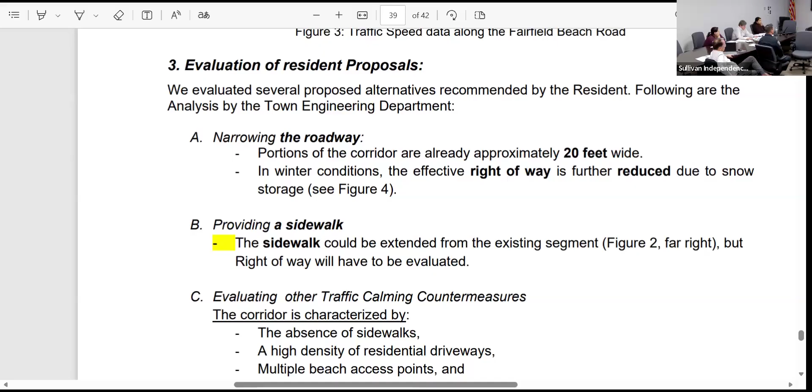Yeah, the portion we're talking about, I've measured it myself in different spots, it's over 30 feet wide. So that alone, I don't think we'd have a lot of opposition having a sidewalk on our side, but if someone arbitrarily thought 'oh, I'm gonna lose some of my property' - there's room in the road to make it whatever it is legally, 9 feet, whatever. I've learned a lot from coming to these meetings about different traffic calming techniques to achieve the same goal, which is safety and slowing people down.

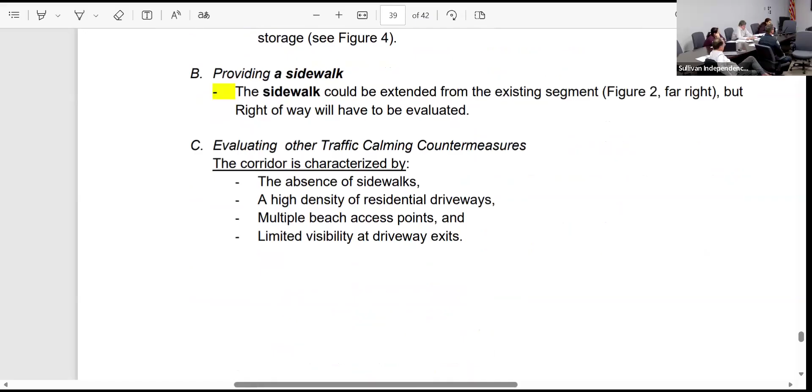But certainly I think a sidewalk on that side would be welcomed by the actual people that live there and would be good for the community, because it's just such a heavy pedestrian trafficked road. Just one point, but I know - just getting your input, and again there's 2 people sort of representing the neighborhood, but just for food for thought.

There's always a right-of-way issue, and obviously there's a pavement width issue. Ideally we would have loved to have 4 foot or 5 foot on either side for bike lanes.

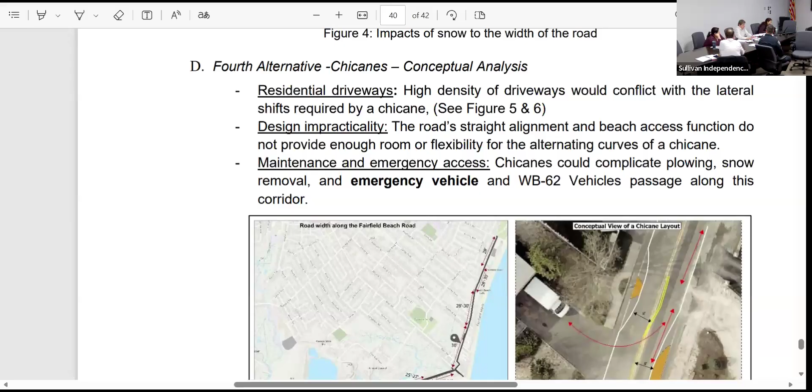But then you need a sidewalk, and you start running out of room. It poses an interesting problem, because at one point, the Bike and Pedestrian Committee, back say 10 years ago, and the East Coast Greenway, which is really a bike trail, goes through there, so it was important to them to try to have a bike lane as well.

Sometimes we have to decide, because there's just not enough room, are more people going to use it as a bike path? Or even, say 15 years ago, rollerblading was a big thing. I don't know if it still is as much, but rollerbladers and bicycles were using the pavement. But obviously having a sidewalk for heavy pedestrian use, which we know is prevalent as well, that's something we try to figure out, and then go from there.

There are some items that we have in the toolbox that we can look at, but we were hoping to get the data, and we'll fix that.

So my question to you is, what kind of alternatives are you thinking to propose so that, from your experience, you're saying it's a high density pedestrian volume over there, the widths are wider, cut through traffic, right? Yeah, for sure. So there's cut through traffic that they are experiencing on that roadway, yeah.

So Megan, where are we on the SS4A? Because one of the objectives, are you guys familiar with SS4A, the grant? So we applied for a grant 2 years ago. Federal grant, we got $350,000.

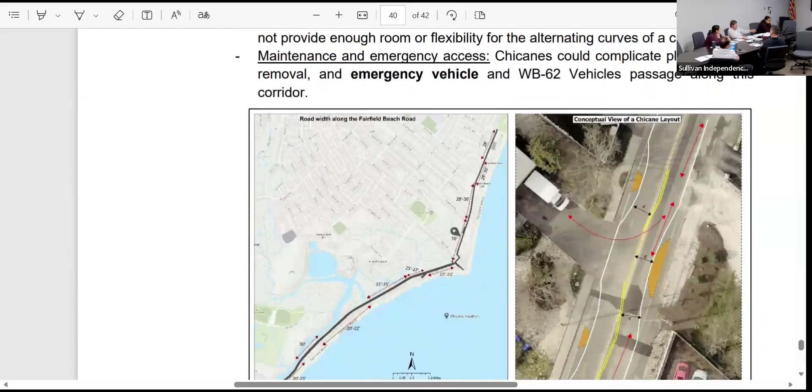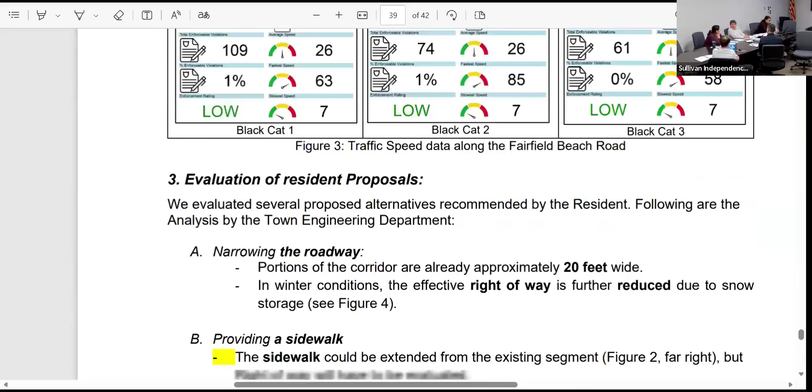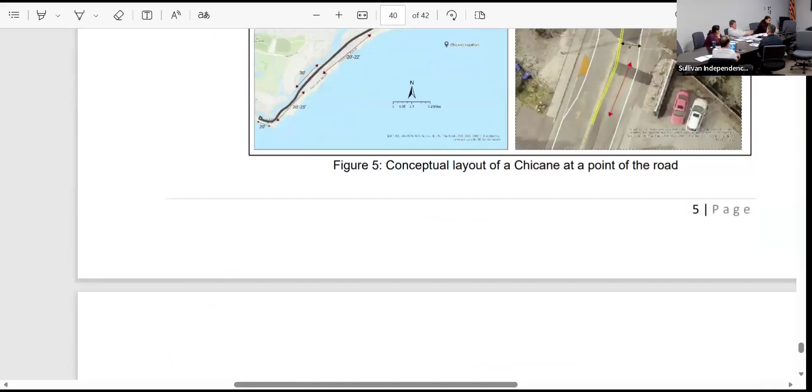The way it was is that at least on one side we had like a 4-foot buffer for the bike lane or whatever. On the other side we only had 1 foot, and I think this was one of the sections where we did a 10-footer, or maybe even a little narrower, because the pavement width just isn't there. It really widens out by Penfield, where I think the old medians were, and they eventually took them out and paved over them.

I think it's actually the first stretch before you get to the first stop sign. I don't encounter as many people walking on the north side, but right after that stop sign there's tons of folks walking in the roadway on the north side, is what I've experienced.

Are we talking right between Penfield and the last stretch of it? I feel like there's tons of people walking around Penfield and Reef. No, there are a lot on our side of the street that, while we have a sidewalk that parallels the Fairfield Beach Club, there are just as many people walking in the road, and it really started more during COVID.

When people get out, they just say, I'm gonna walk in the road and run in the road, so I can see the traffic coming. And to your point, the sidewalk's really only wide enough for one or two people. So long and short of it, I'm not just going anecdotal here, having lived there for almost 6 years - there's a lot of people that walk on the side of the road where there's no sidewalk.

Excuse my ignorance of the jargon, but is the fog line synonymous with that white line? Yes, shoulder - yeah, that's exactly what I meant. You hit the nail on the head in terms of where we are. There's no fog line, so the road basically goes all the way to my mailbox if they want it to, so I'm just walking into the road, versus there's 30 feet there.

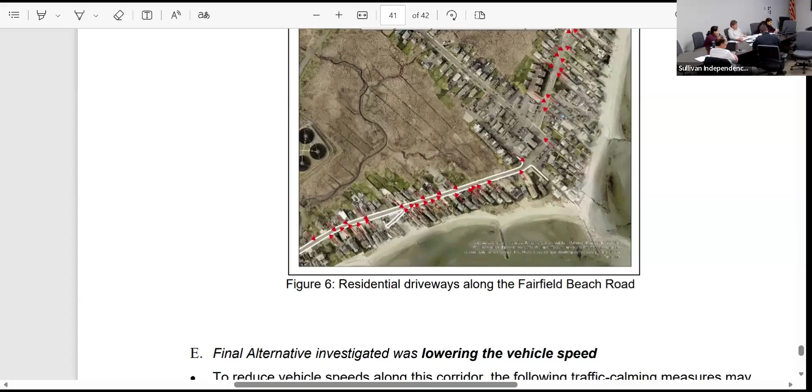That part of the road all the way down to Penfield Pavilion just gives drivers - they're very comfortable. It's this wide, open straightaway where they have plenty of room to floor it.

Yeah, well, it's hard not having a sidewalk on our side of the street because I have 2 very young children who will eventually walk to Sherman, and right now we walk to the beach a lot. There's no sidewalk for me to get to those crosswalks - I have to cross the street with a stroller right in front of my house where people are speeding. If we had a sidewalk, I could get to those crosswalks and cross in the crosswalk.

Right now, I don't have that option, I have to be pushed into the street. Even the fog line just centers the traffic there. People whip around that turn from Beach Road and quite often don't observe that stop sign, just fly on. Third house up, without a sidewalk, they come whipping around, and I'm there with a stroller, and it's pretty dangerous.

This is where perhaps you could help the town out a little bit as well, in that my colleague in Westport today even mentioned it at the Safe Streets for All call that we had.

Westport feels it's easier to build a road than construct a sidewalk, because usually the sidewalk comes after everything's already been established, if you're trying to hit an area that's already developed. So what we're encountering in other locations is we don't have the neighborhood support for a sidewalk. So if there was neighborhood support on the north side, it will help you rise to the top, knowing that we have the support.